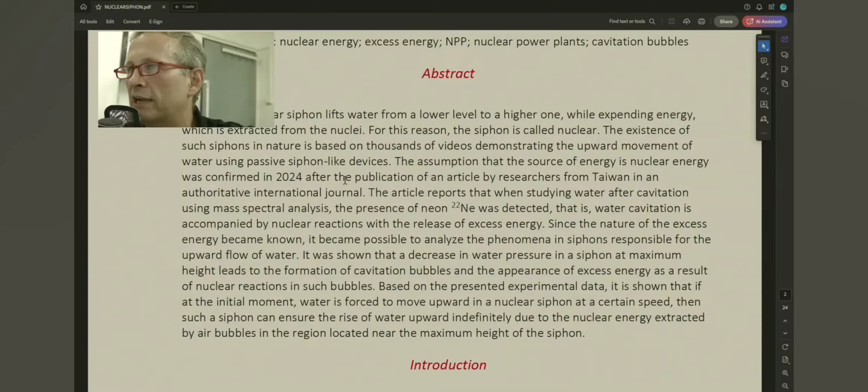The existence of such siphons in nature is based on thousands of videos demonstrating the upward movement of water using passive siphon-like devices. The assumption that the source of energy is nuclear energy was confirmed in 2024 after the publication of an article by researchers from Taiwan in an authoritative international journal. The article reports that when studying water after cavitation using mass spectral analysis, the presence of neon-22 was detected. That is, water cavitation is accompanied by nuclear reactions with the release of excess energy.

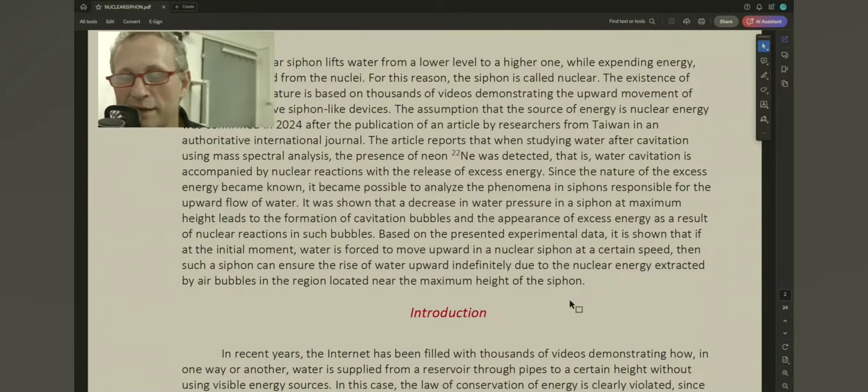In recent years the internet has been filled with thousands of videos demonstrating how in one way or another water is supplied from a reservoir through pipes to a certain height without using visible energy sources. In this case, the law of conservation of energy is clearly violated, since the potential energy of the Earth's gravitational field increases. Unfortunately, the scientific community does not pay attention to these videos, believing that they are fakes. In many cases, this is true. However, there are many videos that require explanation.

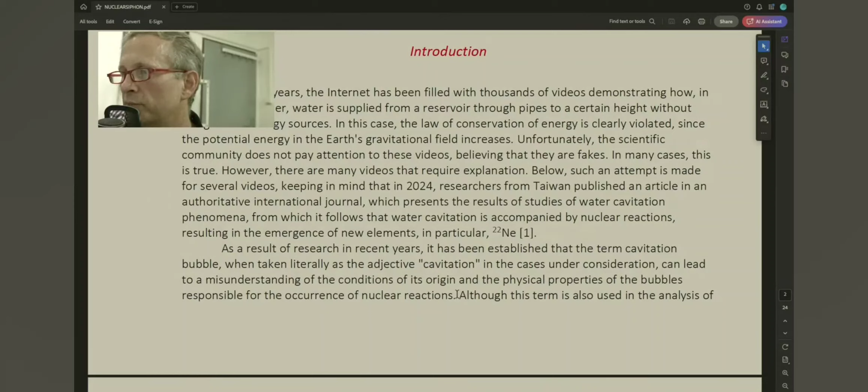Below such an attempt is made for several videos, keeping in mind that in 2024, researchers from Taiwan published an article in an authoritative journal which presents the results of studies of water cavitation phenomena, from which it follows that water cavitation is accompanied by nuclear reactions resulting in the emergence of new elements, in particular neon-22. As a result of the research in recent years, it has been established that the term cavitation bubble, when taken literally as the adjective cavitation in the cases under consideration, can lead to a misunderstanding of the conditions of its origin and the physical properties of the bubble responsible for the occurrence of nuclear reactions.

Although this term is also used in the analysis of the properties of bubbles that arise during acoustic cavitation, the study of single bubble sonoluminescence has shown that a cavitation bubble is not a void, but a complex formation consisting of heated gas and the light emitted by it. The light is circulating along the surface of the bubble.

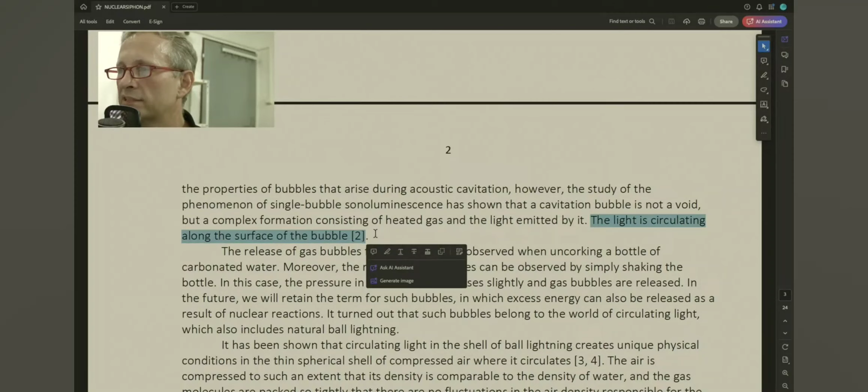Okay, so this is their theory. So obviously they have an understanding of how a cavitation bubble is working, at least in some aspects, and so they feel this is a support for that. But if you just put it aside, to say that somehow there is some energy...

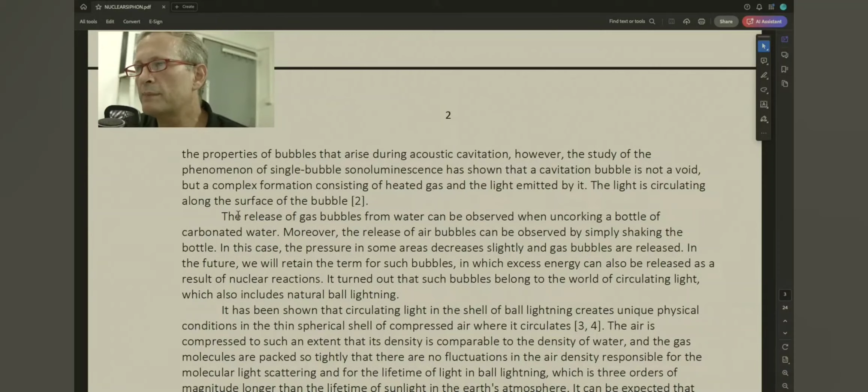So the release of gas bubbles from water can be observed when uncorking a bottle of carbonated water. Okay, so there's some natural thing here. It turned out that such bubbles belong to the world of circulating light, which also includes natural ball lightning. So circulating light is one way of describing the toroidal moment electromagnetic structure.

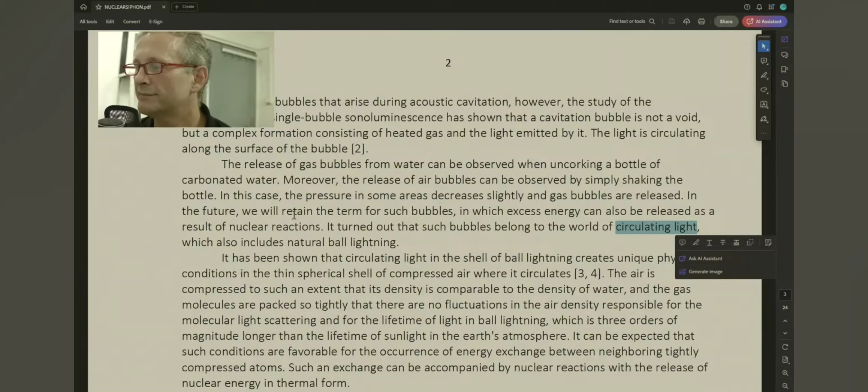Okay, so if you have an electromagnetic wave circulating round, then that would lead to the same kind of thing. So we're in the same ballpark here.

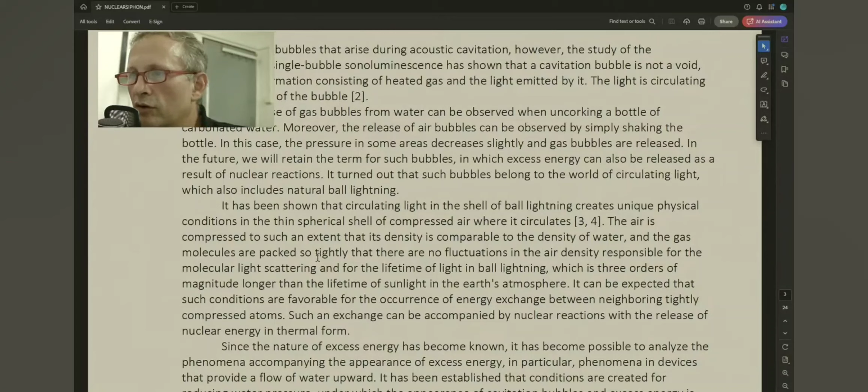It has been shown that circulating light in the shell of ball lightning creates unique physical conditions in the thin spherical shells of compressed air where it circulates. The air is compressed to such an extent that its density is comparable to the density of water, and the gas molecules are packed so tightly that there are no fluctuations in the air density responsible for molecular light scattering, and for the lifetime of the light in ball lightning, which is three orders of magnitude longer than the lifetime of sunlight in the Earth's atmosphere.

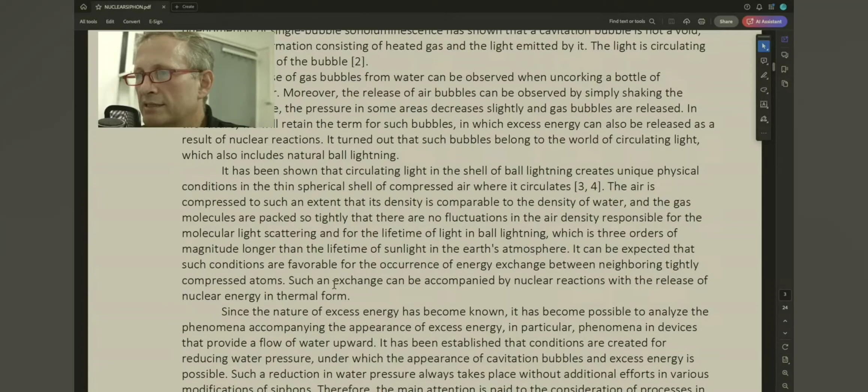It can be expected that such conditions are favorable for the occurrence of energy exchange between neighboring tightly compressed atoms. Such exchange can be accompanied by nuclear reactions with the release of nuclear energy in thermal form.

Okay. Since the nature of the excess energy has become known, it has become possible to analyze the phenomena accompanying the appearance of excess energy, in particular phenomena in devices that provide a flow of water upward. It has been established that conditions are created for reducing water pressure, under which the appearance of cavitation bubbles and excess energy is possible.

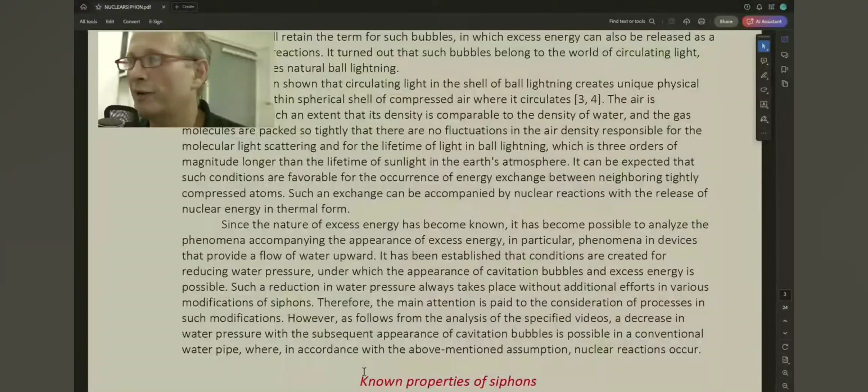He goes into known properties of siphons, and says that basically you have a pressure differential, of course, and then it goes from the top to the bottom. The B here is using a nuclear siphon where somehow the water goes from a lower level up to a higher level. Okay? Right.

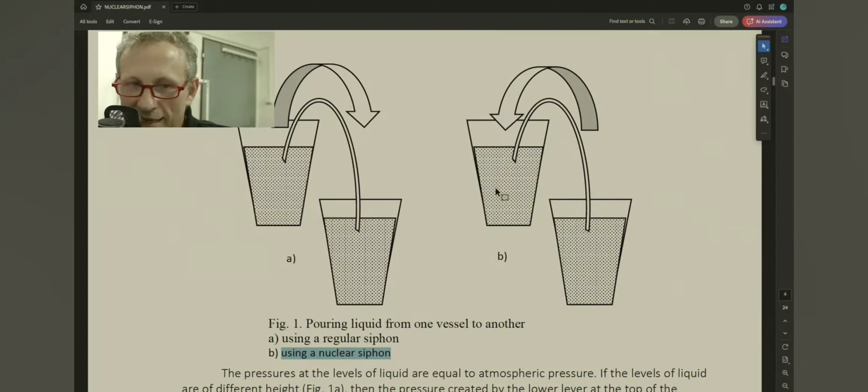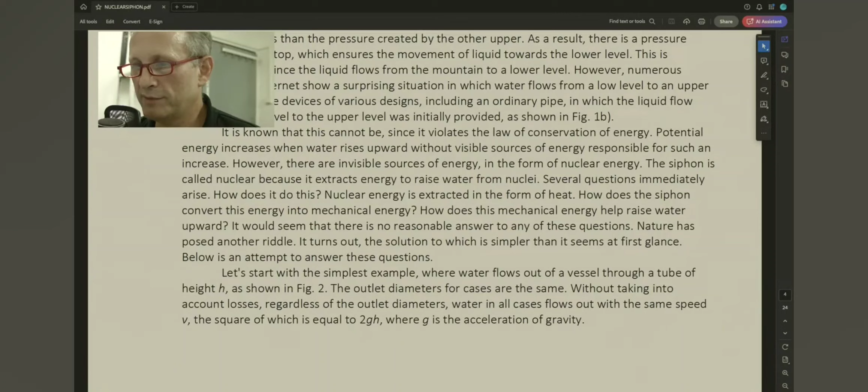So it explains here, and you can go and read this paper. I will give the links in the blog afterwards. You might be able to find it on ResearchGate if you just type in the word nuclear siphon, or the phrase nuclear siphon. Very well explained, all of these diagrams going on here.

So if we take the description of B, everyone hopefully should know how a normal siphon works.

However, numerous videos on the internet show a surprising situation in which water flows from a low level to an upper level using passive devices of various designs, including an ordinary pipe in which the liquid flow from the lower level to the upper level was initially provided, as shown in figure 1b.

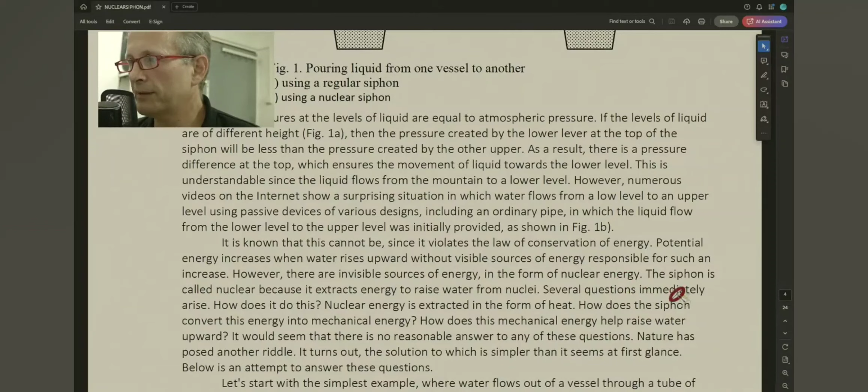It is known that this cannot be, since it violates the law of conservation of energy. Potential energy increases when the water rises up without visible sources of energy responsible for such an increase. However, there are invisible sources of energy in the form of nuclear energy. The siphon is called nuclear because it extracts energy to raise water from nuclei.

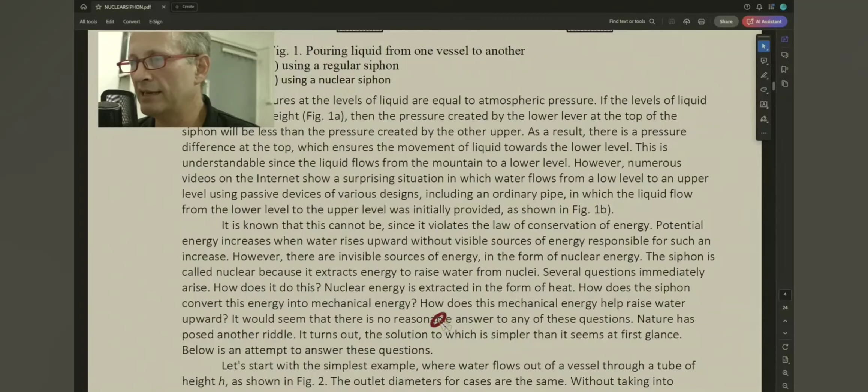Several questions immediately arise. How does it do this? Nuclear energy is extracted in the form of heat. How does the siphon convert this energy into mechanical energy? How does the mechanical energy help raise the water upwards? It would seem that there is no reasonable answer to any of these questions.

Nature has posed another riddle. It turns out the solution to which is simpler than it seems at first glance. Below is an attempt to answer these questions.

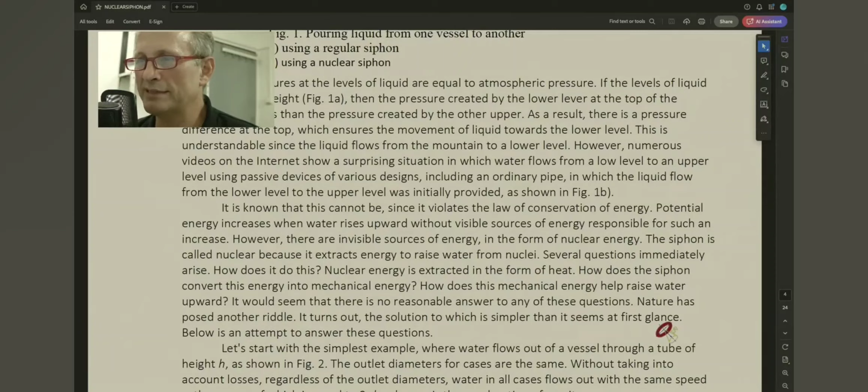Let's start with the simplest example, where water flows out of a vessel through a tube of height h, as shown in figure 2.

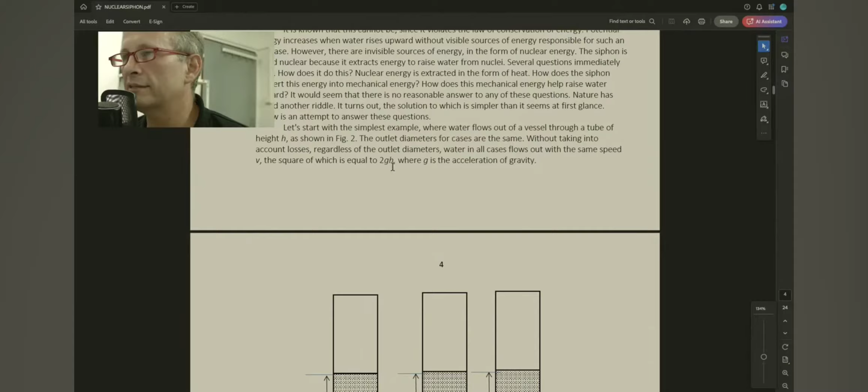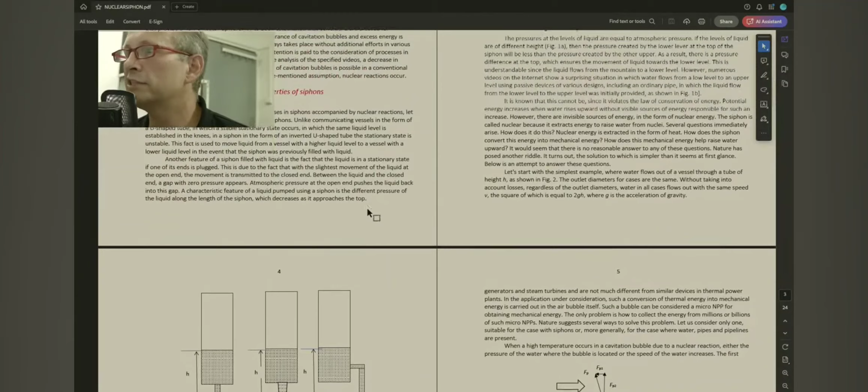Okay, I'm going to have to zoom this down a bit. In fact, I might just abbreviate this. There's only a few spelling errors in this. It's excellently written, very easy to follow. Okay, am I going to be able to see everything? I don't know, maybe I can put up two pages at a time. Two-page view, there we go. Oh, it's got the wrong pages viewing. That's not very helpful, is it?

Oh dear. Okay, let's start with the simplest siphon, where the water flows out of the vessel through a tube of height h. That's h. As shown in figure 2, the outlet diameters for the case is the same, without taking into account losses.

Regardless of the outlet diameters, water in all cases flows out with the same speed, v, the square of which is equal to 2gh, where g is the acceleration of gravity. So far nothing new has been given regarding the properties of a siphon.

New information arises when discussing the problem of how to make a water siphon flow in the opposite direction.

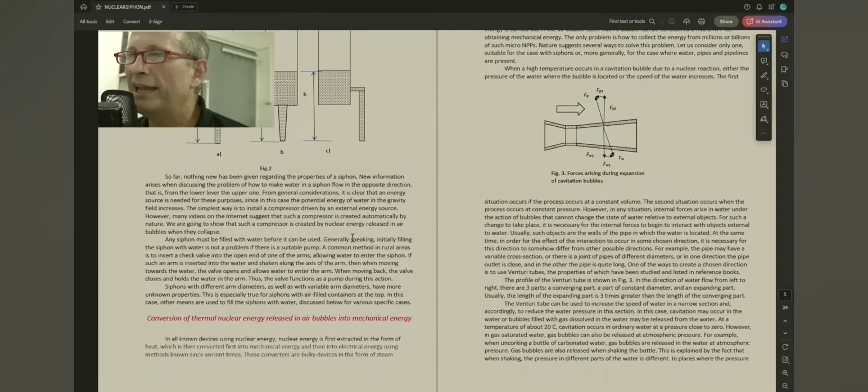Anyway, he goes into the venturi here, and he talks about the forces in the venturi, and of course we know that the venturi is in the heating system that produces solitons from two rarefaction impacts, rarefaction pulses, prior to going into the venturi.

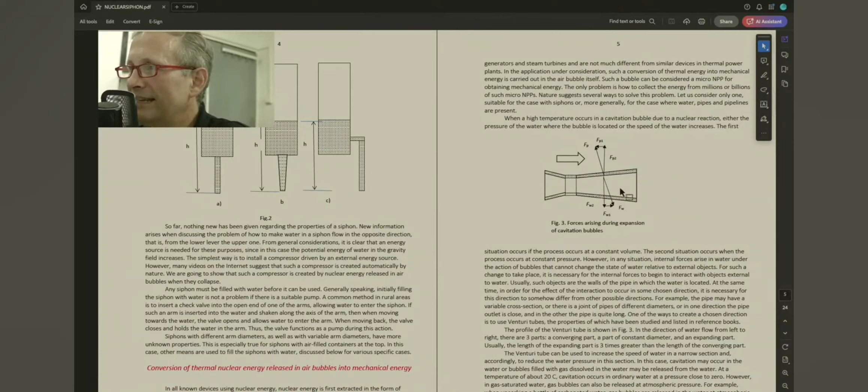That produces a soliton, a nascent soliton. As it comes through here, that expands into a cavitation bubble in the center of the stream. And he is explaining here how the forces lead to the cavitation energy release, producing a net force forward rather than backward because of the restriction here.

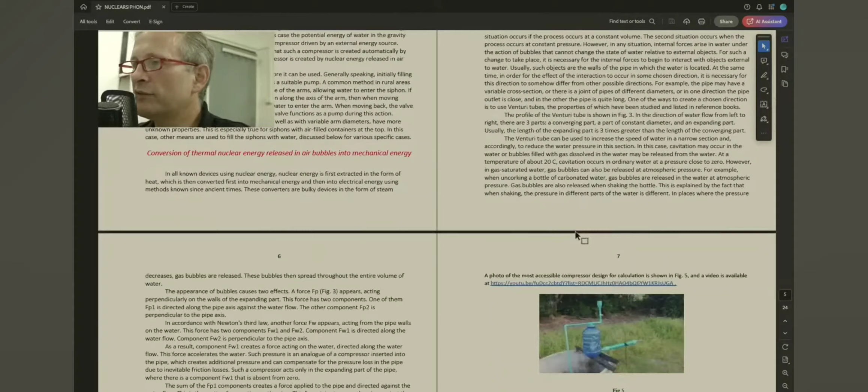And it's even more extreme in the nuclear siphons. He says the same kind of thing as you see in the venturi, where the water is forced to go through here fast and then it slows down, causing a drop in pressure and the formation of the bubbles.

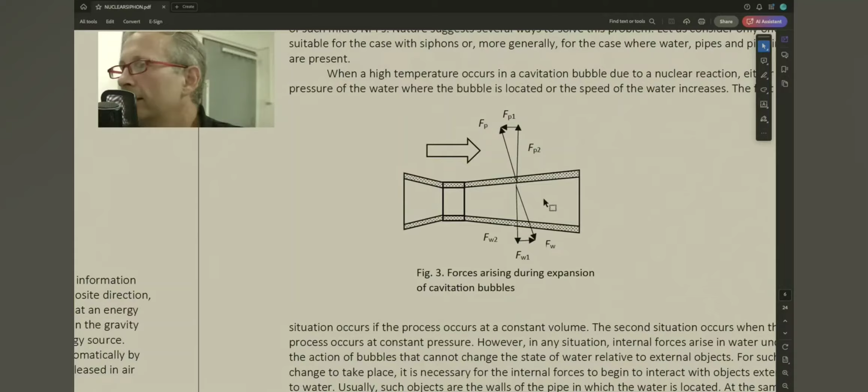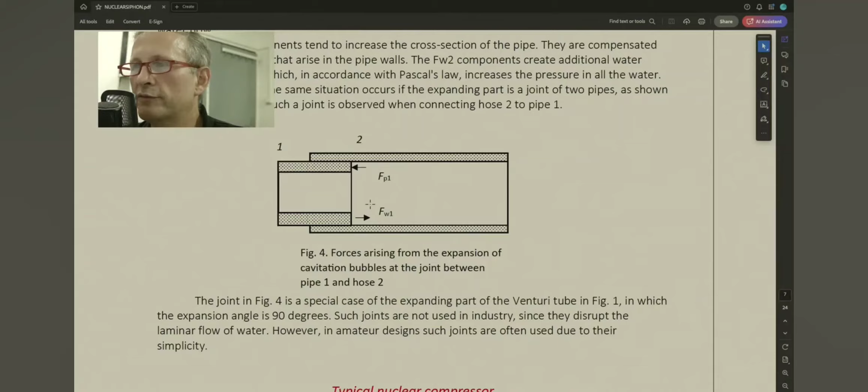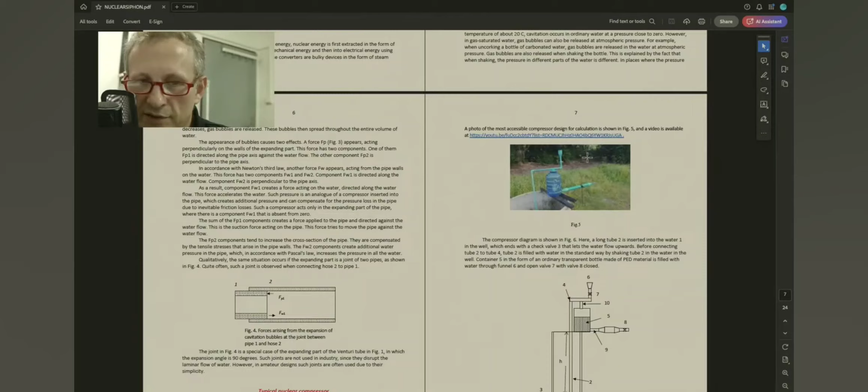He's saying that in a simply joined pipe like this, you again have a point where you get differential forces going on, so you get a net forward pulse. But typically in these devices, and he shows video links to a whole number of these devices, okay, essentially it's very well described.

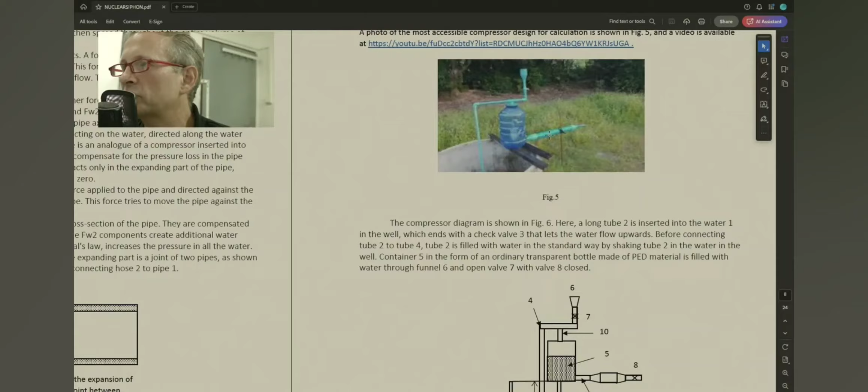You fill up this container here with water, and it pulls down on this chamber as the water is draining out of it until, through this much thinner tube, the drop in pressure in here is high enough, the negative pressure, the vacuum that's produced by the water coming out under gravity through this much larger bore here, okay?

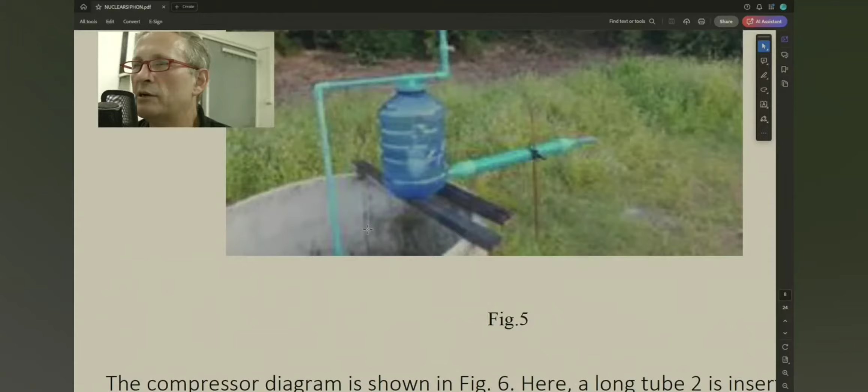So you have a much larger bore here. Water in this cavity comes out, goes into this bore. The thin tube here allows for the water to be sucked up here until you get an equilibrium between the water coming out here and going in here.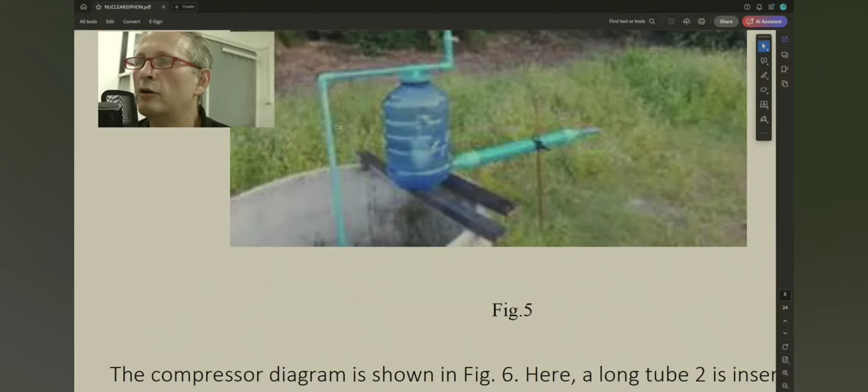And the net difference is made by the pressure drop, the Venturi effect, causing cavitation bubbles that push back on a one-way valve at the bottom. So when the bubble occurs, the heat is produced and it pushes back against the whole column of water and pushes some water forward.

This is a very serious player from the Russian Academy of Sciences who's done a very serious paper analyzing these devices. The compressor diagram is shown in figure 6.

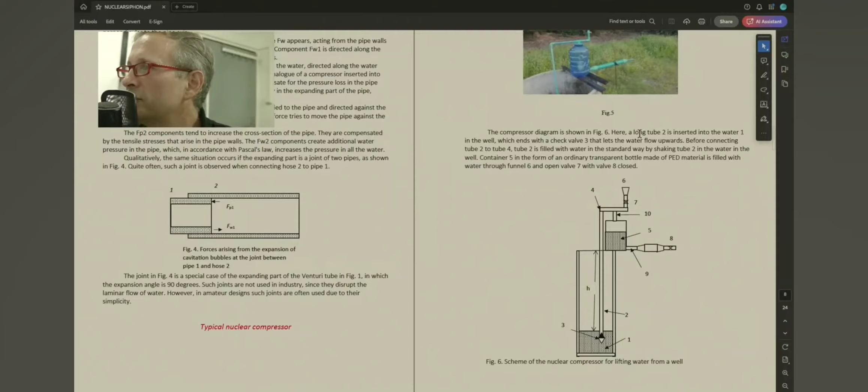Here, a long tube is inserted into the water. So this is the long tube here, in the well. This is the water in the well, which ends with a check valve 3. This is the check valve.

This is something that I've been using quite a lot of in setting up the water system in the place where I set up the water system. And that lets the water flow upwards. So the check valve, it's a non-return valve, so the water can come in and not go out.

Before connecting tube 2 to tube 4 up here, tube 2 is filled with water in the standard way by shaking the tube in the water in the well. So basically you have this separated here and you push down rapidly and lift up, and it pumps water effectively. It's like a hand pump on a tube until it's reached the top level. So you pre-prime the pump effectively by filling the water column here.

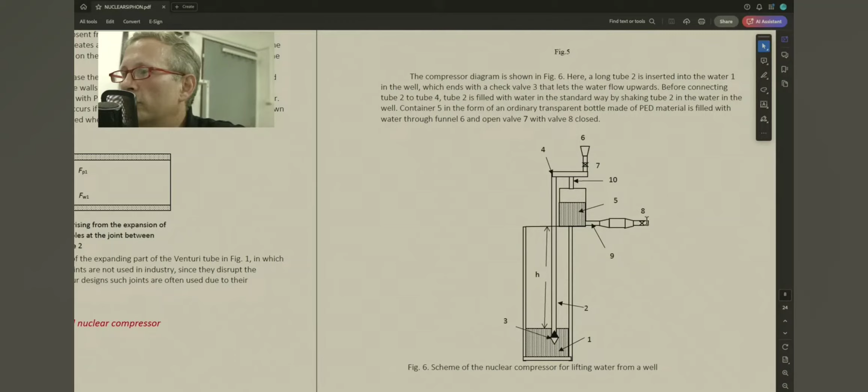Container 5, this big blue one I showed you above, in the form of an ordinary transparent plastic bottle, is filled with water through funnel 6 here, and then there's another valve to shut that off, and open valve 7 with valve 8 closed, the outflow here. After bottle 5 is completely filled, valve 7 closes.

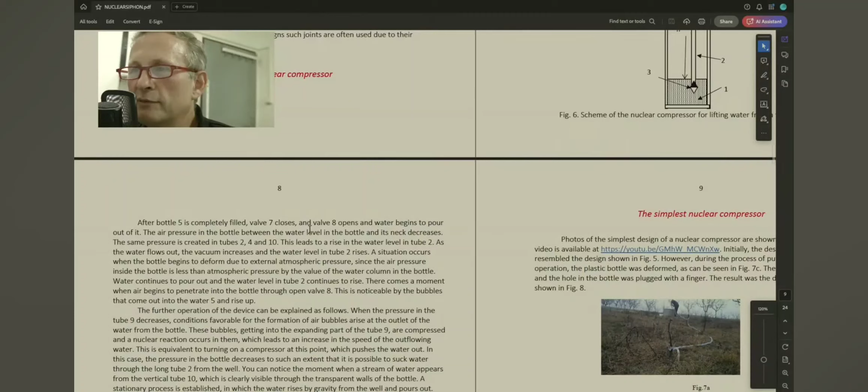I don't know if you can see both of these on the page. And water begins to pour out. The air pressure in the bottle between the water level and the neck decreases. The same pressure is created in tubes 2, 4 and 10. So the pressure drop occurs in here.

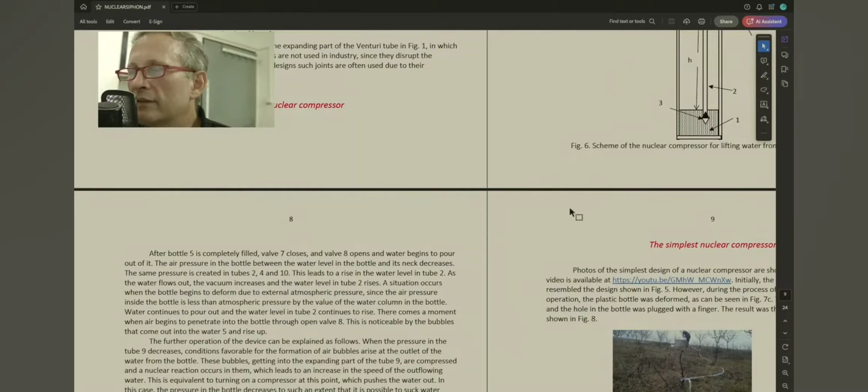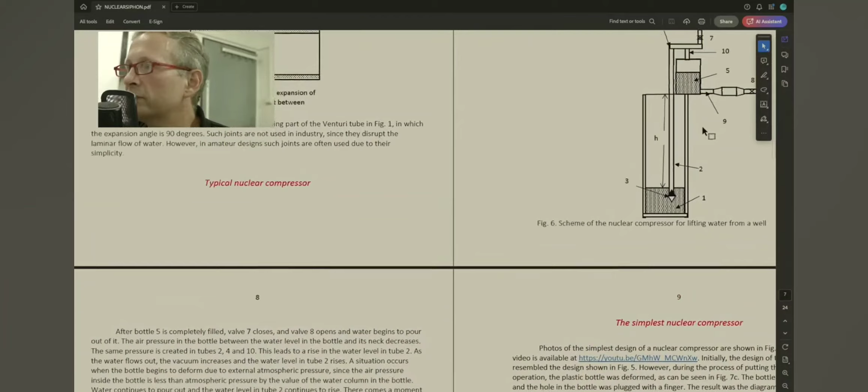This leads to a rise in the water level in tube 2. So it starts to pull this up. Remember, we've already pre-primed it up to this level. And this causes a pressure drop here, which forces the water over the top, because you've got atmospheric air pressure pushing down on here.

This leads to a rise in the water level in tube 2. As the water flows out, the vacuum increases and the water level in tube 2 rises. The situation occurs when the bottle begins to deform due to external atmospheric pressure. Since the air pressure inside the bottle is less than atmospheric pressure by the value of the water column in the bottle, water continues to pour out and the water level in tube 2 continues to rise.

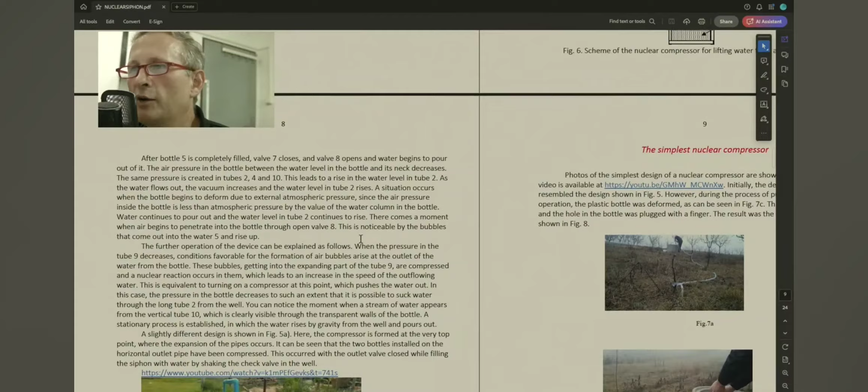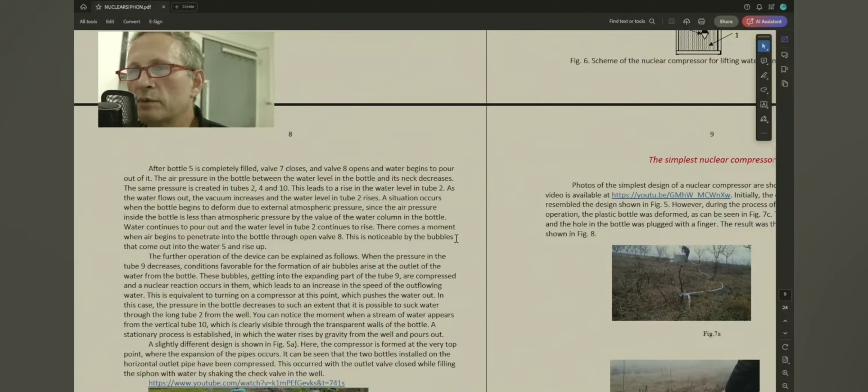There comes a moment when air begins to penetrate the bottle through open valve 8, because of the air pressure differential, and you get a mixed fluid gas situation in there. This is noticeable by the bubbles that come out into the water at 5 and rise up.

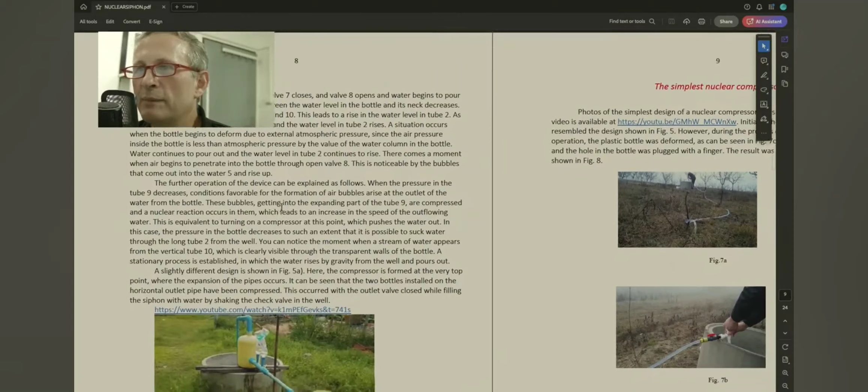A further operation of the device can be explained as follows. When the pressure in tube 9 decreases, conditions favorable for the formation of air bubbles arise at the outlet of the water from the bottle. These bubbles, getting into the expanding part of tube 9, are compressed and a nuclear reaction occurs in them, which leads to an increase in the speed of the outflowing water. So you get a speed increase coming out here, or wherever it is in the other part of the system.

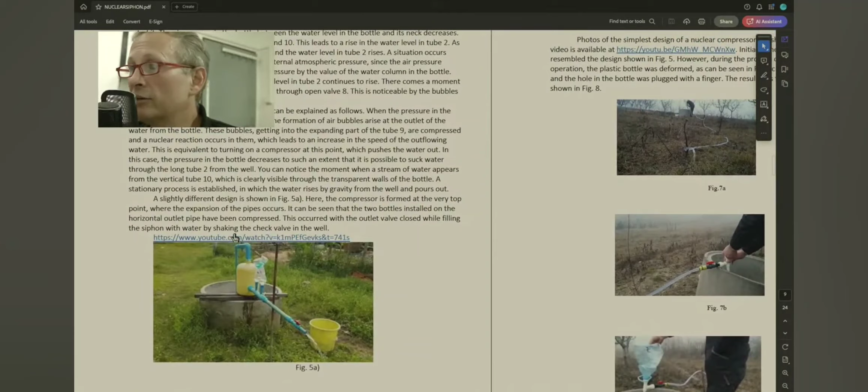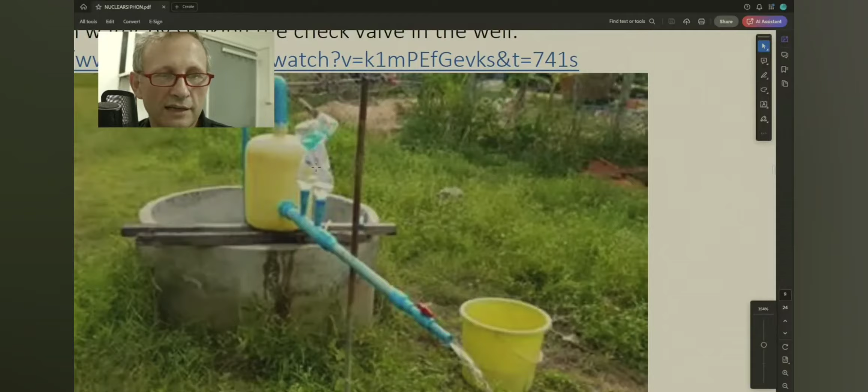You can notice the moment when the stream of water appears from the vertical tube 10. Anyway, to cut a long story short, he goes through several of these videos, the ones that are more plausible. And you can see here, in this case, they've got a big vessel, but they've also got these vacuum bottles on here.

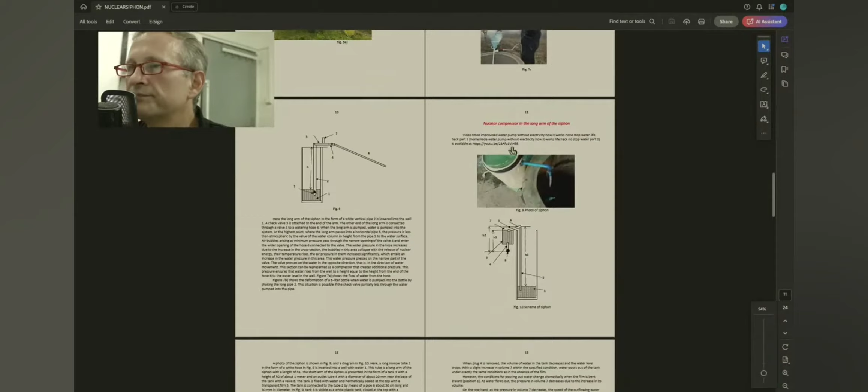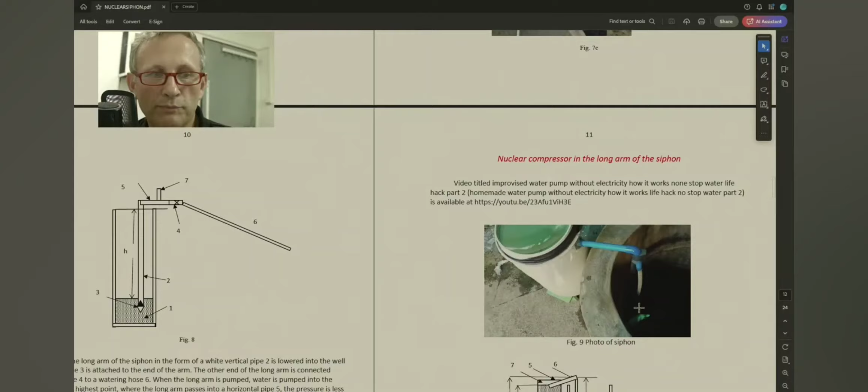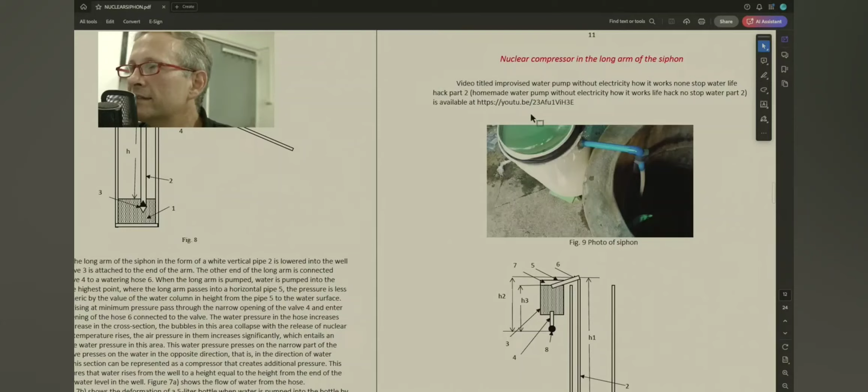This is another analysis of a variant on the one above, and he goes through various variations. In this one, which is quite nice, they have a large tank going into a well through a small bore tube, and a fat outlet. They actually put a membrane on the top, which is see-through, a polymer membrane, and you can see it very substantially suck down. So it's creating the same vacuum effect, but this is quite simple by comparison.

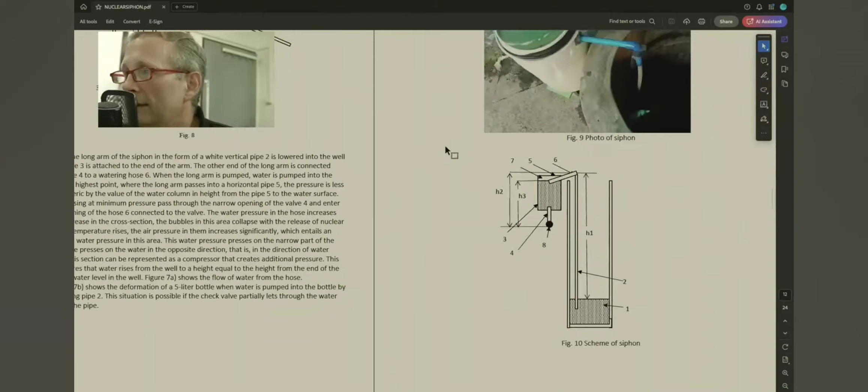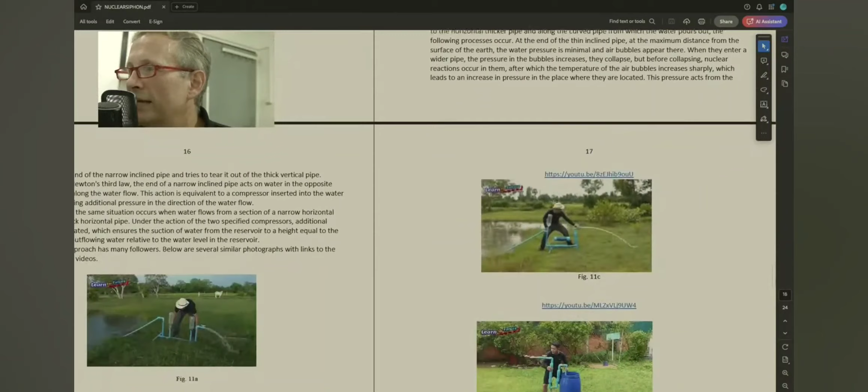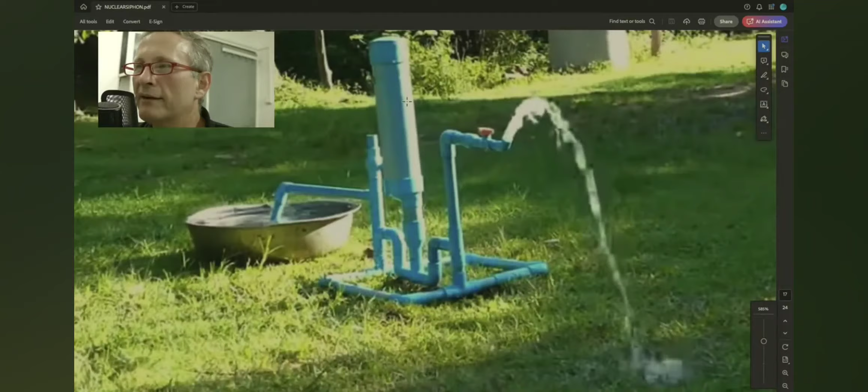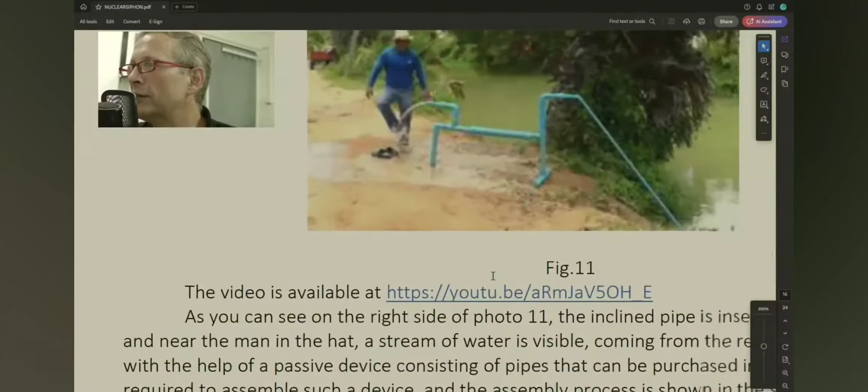I would encourage you to go and have a look at this. This for me is one of my favorite ones because I think this is the one we might attempt to replicate. It's really rather simple, and this guy has done a wide variety of these same things. This is different in that he forces the vacuum in this tube to create the initial effect, and it's not so plausible. But there's a wide variety of these things. You can clearly see the pipe here, and one might argue there's some sort of pump in here. But it's not hard to build these things. I know all the skills to do it, having just done it the last two weeks. So I think we might attempt this with Jordan just for shits and giggles.

Okay, so I'm going to show this video here because you get to see him build it.

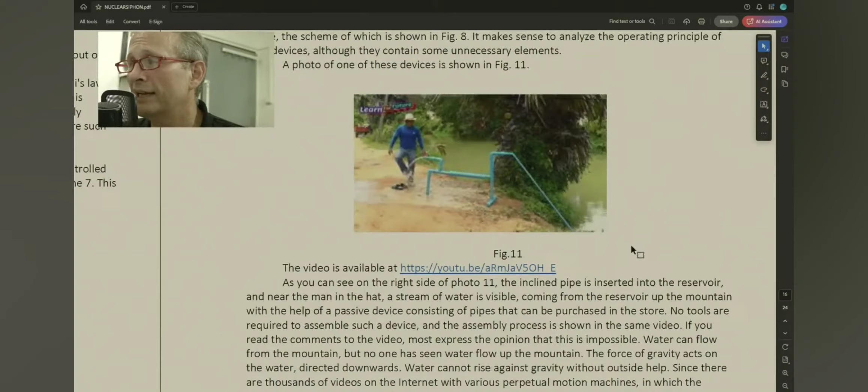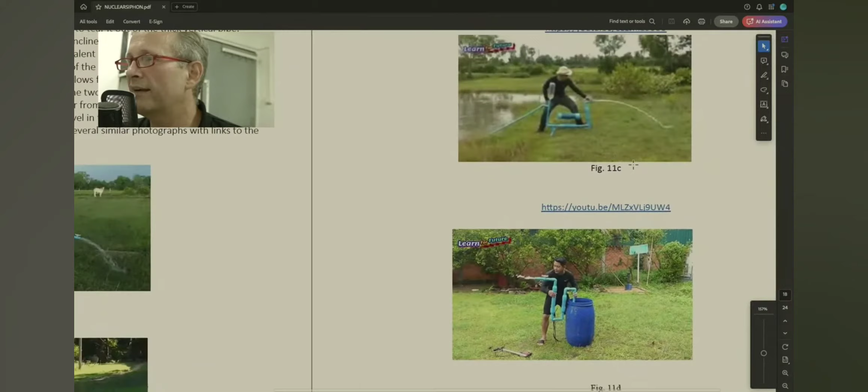There's one thing about having electricity, and one thing about having heat when it's cold and cold when it's hot. Those are transformative. But before you even can eat, you've got to be well watered. And this technology, if realizable, can raise water up to a certain amount above the base level. If you were to have a whole sequence of these things, you could cascade them up and raise water to a higher reservoir level, and then use the water flowing back to the lower reservoir like a pumped storage system to generate electricity. By scaling the whole thing appropriately, you could basically end up with free electricity just using a standard generator. So this is a little bit comical, and I would probably have been skeptical if it hadn't been so beautifully described by this particular author. He gives loads of other different links here.

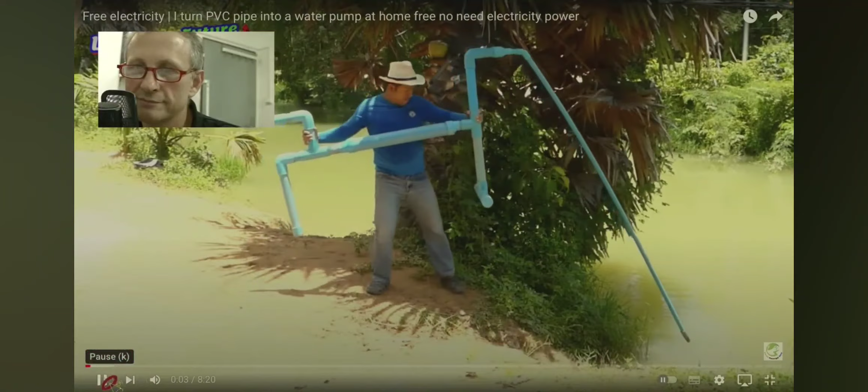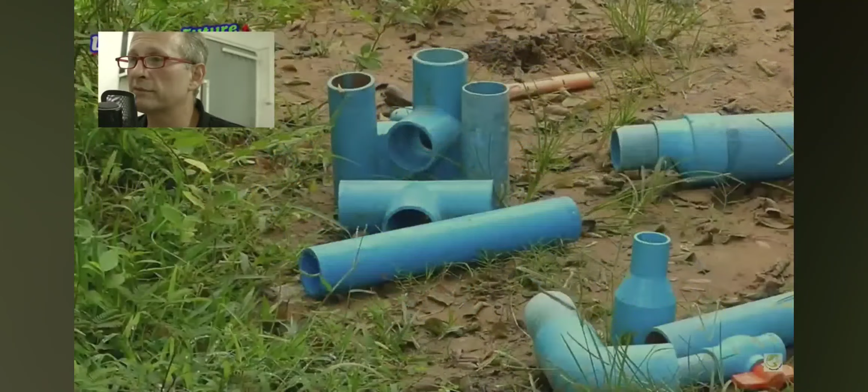So he's using this mechanism to preload the system. The point is this is so simple to build, it's either going to work or it's not. These are standard PVC. You can get some PVC adhesive.

Like I say, if I was watching this video, I'd think, what's the scam here? And still I feel that there might be a scam. But knowing what is described by him and the serious analysis that he does, and knowing that ball lightning structures are being formed in the cavitation system, and knowing that there are several levels in which they operate. One is maybe to create disassociation of water - well, not disassociation. Well, it does do that at an extreme level, but at the base level, it's causing water gas to be formed by pulling extra chi through, or by disrupting the weak polar bonds between water molecules. So you don't need nuclear level energy, you just need the production of water gas above the check valve, which will then push the water through, over the hill and into up to a higher level.

Okay, and so as he's assembling this, I will say that what I believe might be going on is that PVC can get charged, okay? And there will be friction with the water. Water going up that narrow tube will create a toroidal vortex.

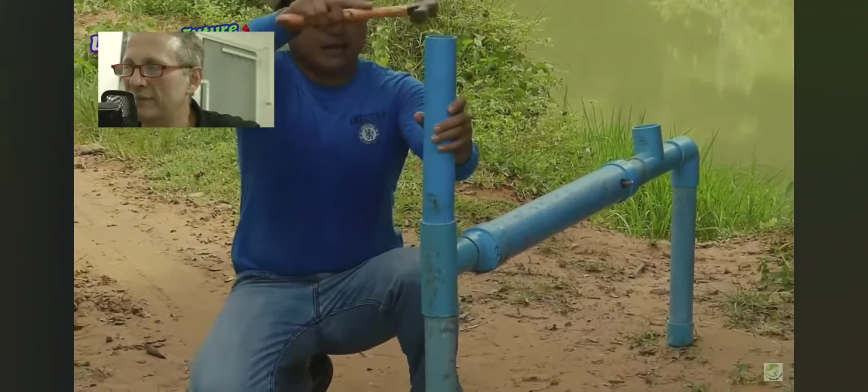In fact, it will be like a Kármán vortex street, but in toroids traveling up that tube. Because it's a polar molecule, it's naturally charge separated, and the end molecules of PVC will likely encourage the EZ water or inverse EZ water. It doesn't matter, actually. But charge separation within the polar charges of the water produces your toroidal vortex in the long, thin column. And what that will do, in my view, for a proportion of that water, is cause it to produce water gas. The water gas then tries to push back against the check valve and closes it. The only way it can expand then is to push water uphill, because water gas, as we know, is...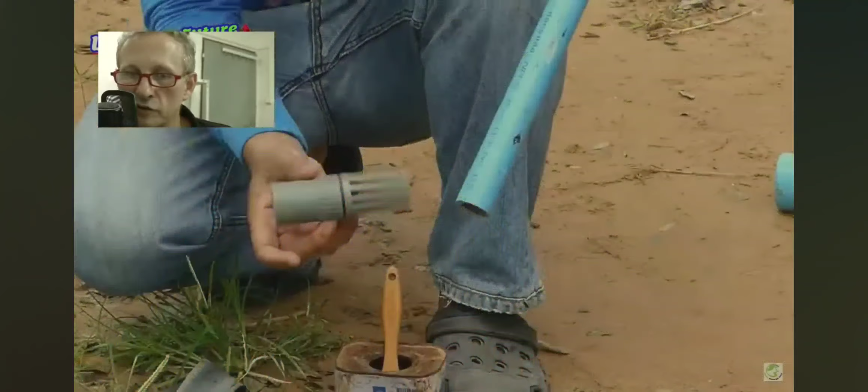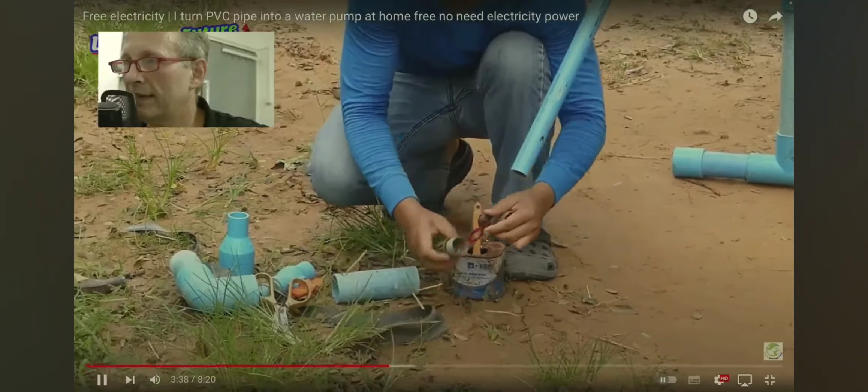1,617 times larger than water. So you only need to convert a minute amount of this water into water gas, and you will be able... I'm going to skip ahead here because I don't want to play the whole video, but he's making a check valve here from a piece of rubber. That's his PVC glue. So essentially, other than a hammer, PVC glue, a saw, and the stock PVC piping, that's all you're needing. Much more narrow tube.

So as the water is forced up here, it will start to produce vortexes. And as it comes over the top, the vortexes will still be produced in here. They will have a toroidal moment, and a back disruption beam. The back disruption beam, and even the forward head of the torus, will cause, in my view, some water gas to be synthesized. You really only need a very small amount of water gas synthesized to push the water up against the check valve at the bottom, and that will cause water to come over. The water coming over will then pull a bit more water up. The point is, I almost don't care whether this is fake, because it's so simple to try and replicate if what you're seeing is what it is.

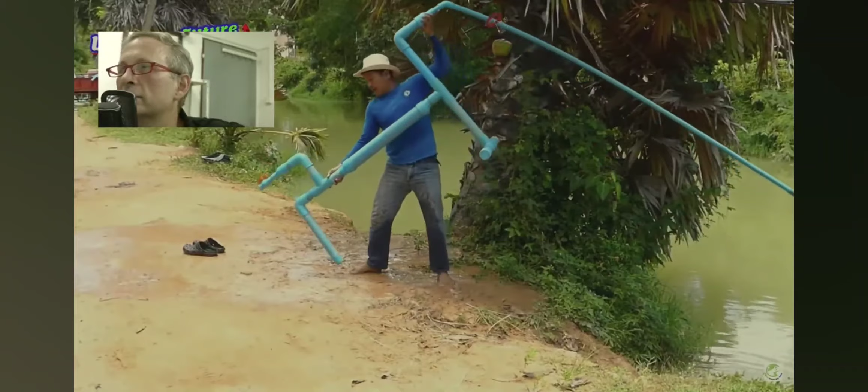So unless there's water flow, I don't think you're going to get this either toroidal moment or pressure-related cavitation energy. The toroidal moment, like I say, weakens, in my view, the molecular bonds between water, causing a proportion of it to turn to water gas. I think this is going on in the water spout from the 1969 NOAA photo. I think that's also what's going on in some HHO systems, particularly in the vibration system of Dr. Ryushin Ohmasa. I think it's a component of what's going on. And in this case, the water gas is able to lead to this very phenomenal and useful practical application of the toroidal moment.

That's it. So I think this might cost about $40 in equipment from scratch, not having everything. I've got the hammer, I've got some of the PVC glue, I need some more, and the PVC piping maybe less than that. And I think it's worth having a go. I think it's just worth having a go.

It does look like an avalanche of bullshit to me. Yes, Hales, right? It does.

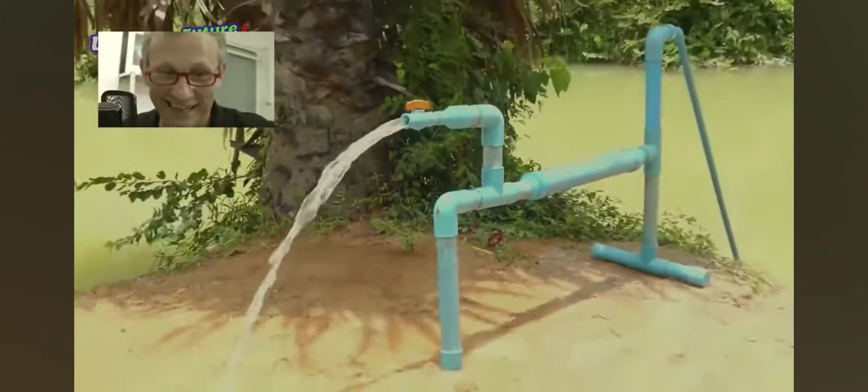But that's how many people felt for most of history about nuclear transmutation going on in cavitation. Really, the Russian scientific community mocked Kladov until after he died, when they found out he was right, by using the now useless hydrowave biological and chemical destruction technology, because they ran out of weapons to destroy. So they thought, well, Kladov said cavitation can do this, ours is a very good cavitator, let's see if it can do it. And they remediated a nuclear isotope, I think strontium-90. Kladov had done cesium-137.

So even for people that knew this guy, for most of his research, they ignored him. And everyone ignored Griggs. So, there we go. All right.

It's so simple, it would be rude not to try. And just because you already know it doesn't work is not a reason not to try when it's that simple. Honestly. Anyway, so that is...

I haven't replicated this already, but he's made a very good argument, the same argument for nuclear energy, which we know cavitation can do, because we've got several systems. When we verify that the Vega Valley Replication 1 is producing the signatures of ball lightning, we'll know that is doing it. And we've replicated it in other experiments. We know Benjamin Huang has sequentially replicated the process, so we know that it can do cavitation that leads to transmutation. It's the same process that's occurring in ball lightning. We know for certain. There's a lot of people out there that would call this a whole load of male cow excrement, but we know for certain.